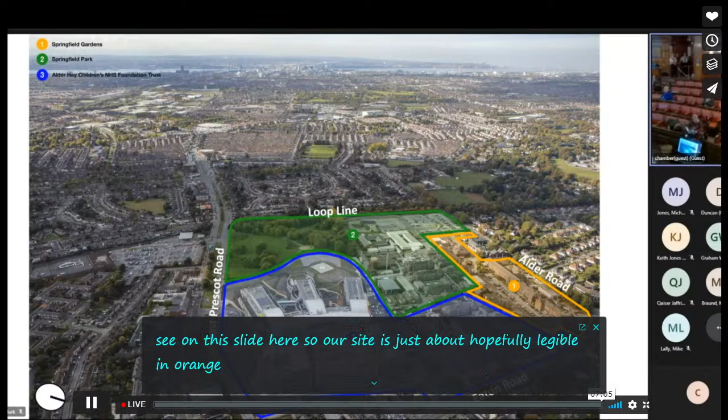This is a part redevelopment of the former Alder Hey Hospital site, as you can see on this slide here. Our site is just about hopefully legible in orange or brown, with Eaton Road to the bottom of the slide, Alder Road to the right-hand side, the new hospital and their expansion land to the left-hand side, and the new park and loop line to the south of the image.

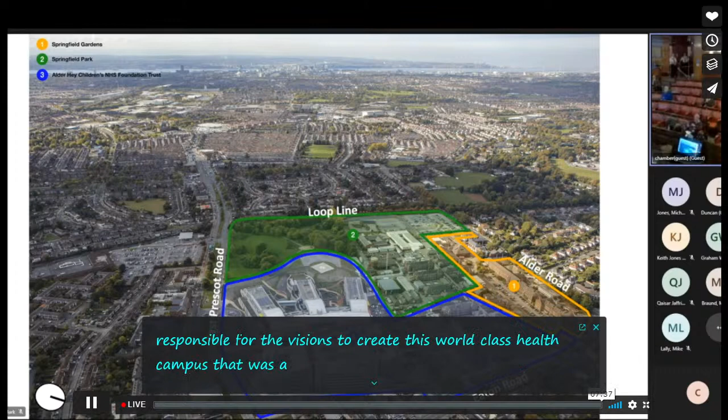BDP have been involved with Alder Hey since the hospital. In 2010, we designed the new children's hospital, and we were responsible for the vision to create this world-class health campus that was awarded in 2018 the Building of the Decade by the BBC.

We've also had a long history with Liverpool, delivering projects such as Liverpool One and that sort of transformational world-class placemaking. We feel Springfield Gardens is a key project both for us as architects and for our clients, Step Places, in delivering the completion of the Alder Hey vision for this site and creating a master plan that knits both healthcare and community together in a unique healthcare campus.

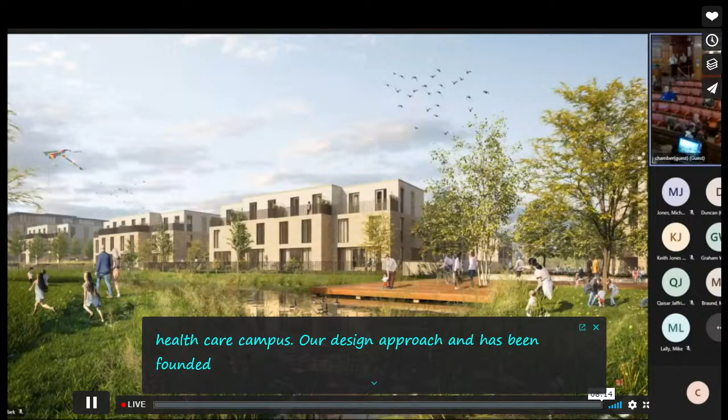Our design approach has been founded on a deep and detailed understanding of the existing site. We understand that the former Alder Hey Hospital played a key role in the foundation of the area surrounding it, and with the relocation of the hospital to its new home, it's created a gap between a lot of the uses.

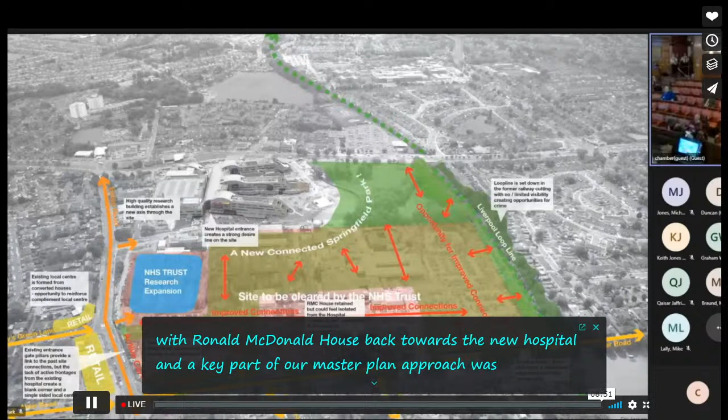Those uses were formerly surrounding the area on Eaton Road and Alder Road, with Ronald McDonald House back towards the new hospital. A key part of our master plan approach was about re-knitting those two things back together and creating a comprehensive, integrated master plan connecting with the new Springfield Park.

This slide captures our vision for Springfield Gardens. It's about creating a bespoke context to Alder Hey Hospital, responding to the needs of the NHS and the wider community, and creating a place that's a key piece of this world-class health campus developing on the adjacent site next to the new Springfield Park.

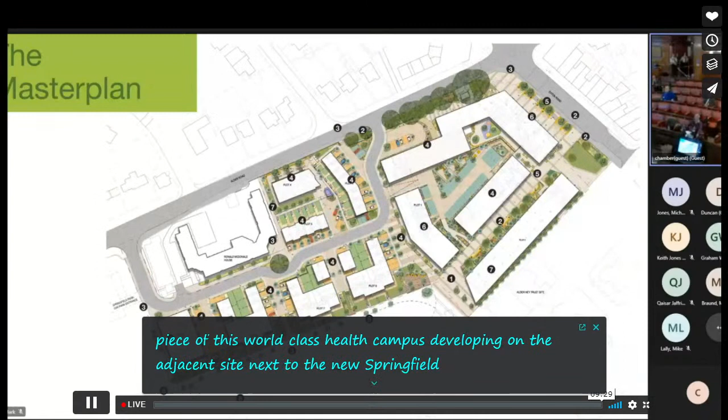Our plans for Springfield Gardens are not just about delivering houses on brownfield land. They're about delivering a new health-led mixed-use community, and the uses within the master plan are mixed and respond directly to that.

To the front of the site, we've got a new step-down care building solely for the use of the NHS. And to the side, running up our new Park Boulevard, is a new science research building for the trust.

To the base of these buildings, we've got some new local retail, complementary to the retail on the opposite side of Eaton Road, hopefully drawing people back to that high street that used to serve the hospital.

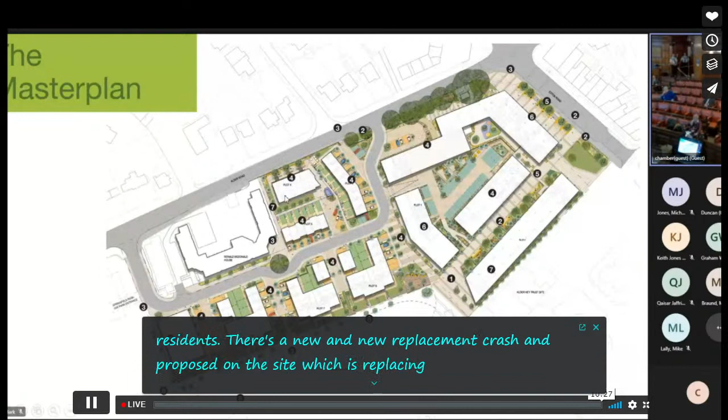To the base of this location, there's a new gym facility responding to the needs of the NHS and local residents. There's also a new replacement creche proposed on the site, replacing a former creche that sat next to Ronald McDonald House, with dedicated drop-off and parking facilities.

To the opposite end of the site, there's a new retirement building responding to the need to create high-quality retirement homes in the city. We're also delivering, next to Ronald McDonald House, specialist housing for young adults with autism, responding to the needs in Liverpool and to the department within the hospital.

We're also delivering a mix of family housing and apartments that deliver the vision set out to us at the start of the project—to attract and improve the retention of the very best people working for the hospital.

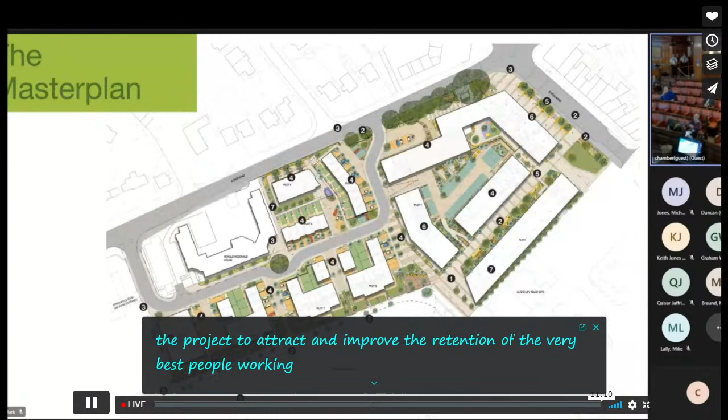Our master plan approach is about creating strong permeability through the site, extending the parkland landscape from Springfield Park through to Eaton Road, and breaking down the traditional barriers the hospital previously set. Our design creates a series of distinct character areas with scale and massing suited to and embedded within the existing context.

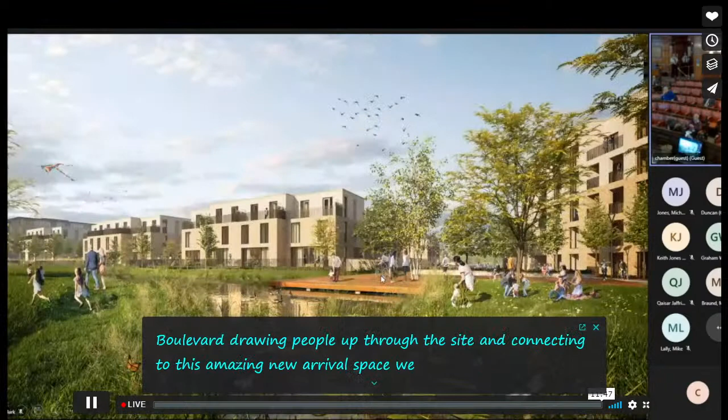We start with a new public piazza created to Eaton Road, delivering a new parkland boulevard, drawing people up through the site and connecting to this amazing new arrival space that links hospital, park and community together in one place.

Alder Road provides a key arrival space for us as well, and an opportunity to break down that former defensive nature of the site with wall and heavily planted edge, and draw connections through to the hospital and the park as a result.

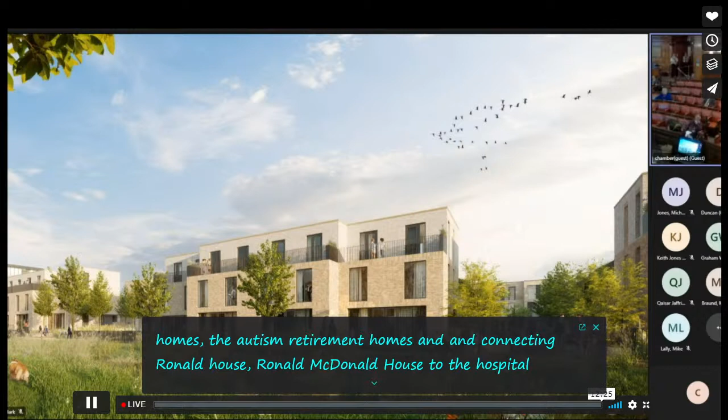To the park edge and Ronald McDonald House, we want to create a quieter residential feel for those family homes, the autism retirement homes. Connecting Ronald McDonald House to the hospital has been a key master plan consideration, with both a direct sight line to the hospital and pedestrian-friendly routes either through the park or through our development proposed.

The park edge is proposed to be permeable and democratic in its design approach, where everyone gets a view, and all the buildings take a well-known urban design principle of providing passive surveillance over the park and enhancing the feeling of safety and long-term usability of that space outside.

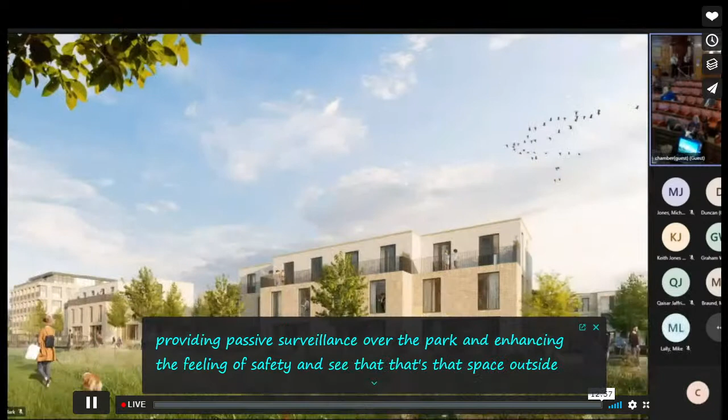After winning the competition in 2017, run by the NHS and the council, we really have taken our time developing this scheme. It hasn't been rushed into planning. We've developed a scheme through extensive consultation with both ward councillors, local community, MP, the planning, highways, tree officer, access officer and urban design officer.

Our scheme has evolved significantly over that period of time to respond to that commentary that we've received. And the scheme being presented today is a culmination of that process to create this really unique and high quality development that you see before you.

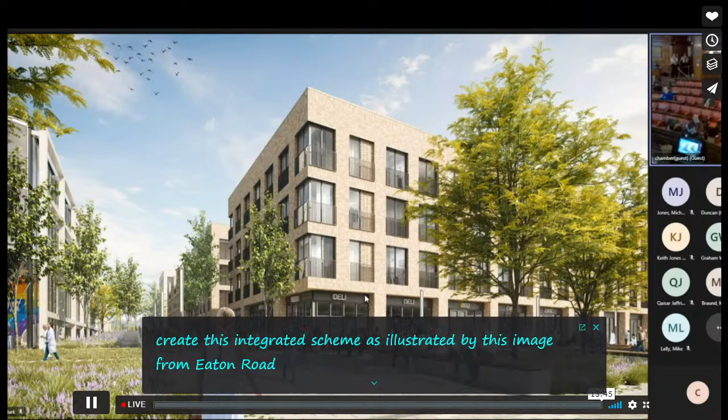Our approach is to create this integrated scheme as illustrated by this image from Eaton Road, where the Park Boulevard, as described, can be seen running up through the centre of the slide. And to the right hand side, you can see this serviced apartment building.

It has a relationship back to the former hospital building that sat on the site with its Victorian strong stature. And to the left hand side is a brand new science research building for Alder Hey itself, which is purposefully contemporary and dynamic and has an exoskeleton to present a biophilic design approach.

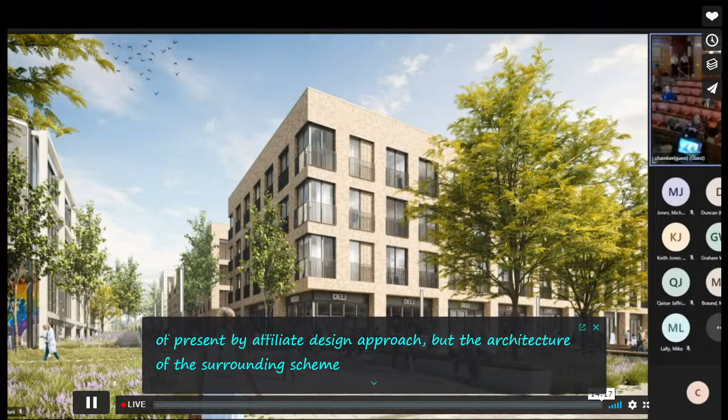But the architecture of the surrounding scheme is intended to be a family of buildings, predominantly in buff brickwork with a few other materials introduced for variety. That's intended to give long-term civic presence to this scheme that is soft and sensitive to the creation of this parkland environment that we want to create.

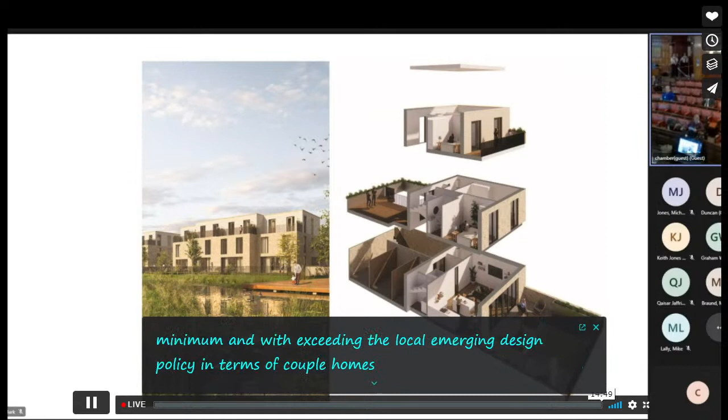All of the homes are designed to the absolute best standards. They're all designed to achieve nationally prescribed space standards as an absolute minimum. We're exceeding the local emerging design policy in terms of accessible homes. And all of the homes that you see before you are bespoke house types. None of these are houses or apartments that have been used on previous schemes. They've all been designed bespoke for this site and this context.

One of the key points obviously is we are providing 2 movement access points, and both of those access points are making use of existing locations of access onto the site. They're not new locations. And as Harry, my colleague, mentioned, our design approach is absolutely in line with Liverpool's policies.

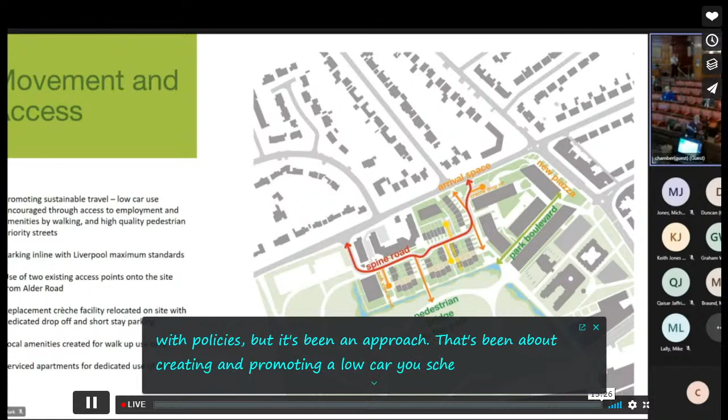It's been an approach that's been about creating and promoting a low car use scheme through access to public transport, obviously employment through the NHS, but also creating all of the amenities that are necessary for people to live sustainably on this site, and obviously have amazing access to the park and the loop line surrounding.

Trees have obviously been a key consideration for us. Alder Road does have a strong green feel, and we are proposing some tree removal to that location in particular. That's about delivering our vision in order to open that aspect and deliver our development.

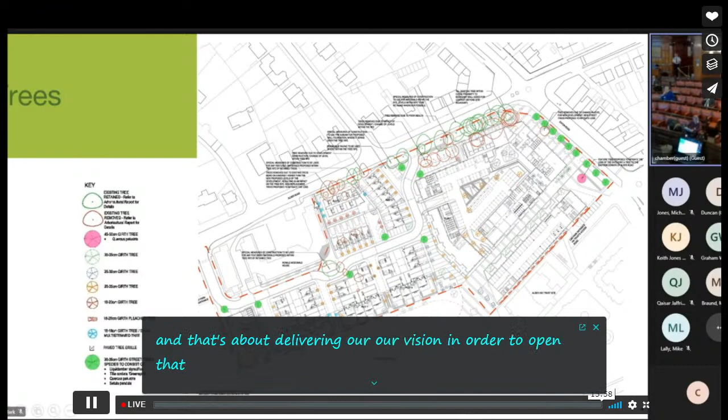But we are providing a significant enhancement to the number of trees that are being provided, with over 140 new trees being planted within the scheme, and a significant amount of net biodiversity gain.

This sort of just shows you some of that context with Windmore Road there, and some of those trees running down that side. And the vast majority of those trees are being retained. That aspect should be noted as well.

Inclusive access, as I've mentioned at the outset of this scheme, is all about inclusive access. The context of where it sits is massively important. We are looking to over-provide M4(3) homes within the scheme, and health and wellbeing has been the foundation block of working in this health campus environment that we see ourselves. So that's about creating new public spaces, extensive greening on the site, minimising the need for car usage, and creating buildings that are inherently sustainable and ecologically friendly.

In summary, we're massively excited by this scheme before you today, and this has taken a long time to bring forward, and we're very pleased to have the support of your officers. We believe this is a really unique opportunity to not only create a high quality mixed use residential development, but also one that promotes and supports Alder Hey Hospital, and we think this is going to create another piece of that world-class health campus that will keep people coming back to this site and want to be employed on this site long into the future.

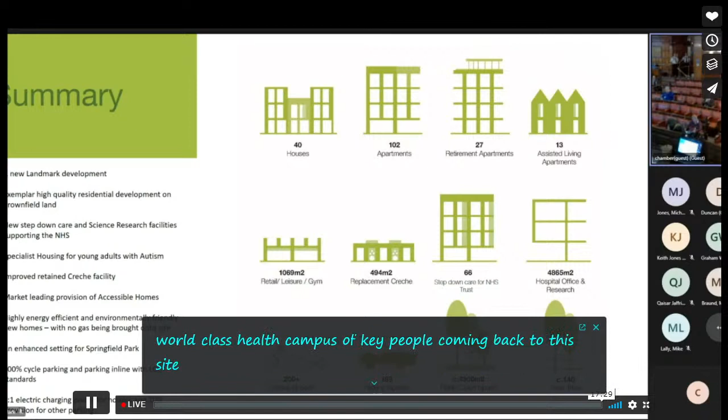I'll now hand over to my developer, Harry Dallywell, to talk you through his approach to the scheme. Thank you.

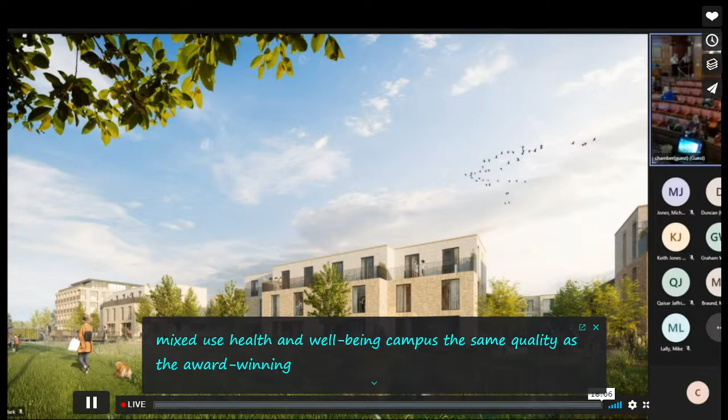Good morning, my name is Harinder Dallywell. I'm the Managing Director of Step Places. We're an award-winning placemaker and developer. We work across the northwest of England with public sector partners, bringing forward and delivering sustainable design-led schemes. The brief was to produce a mixed-use health and wellbeing campus with the same quality as the award-winning hospital buildings, promoting the benefits of healthy lifestyles through placemaking and sustainable development.

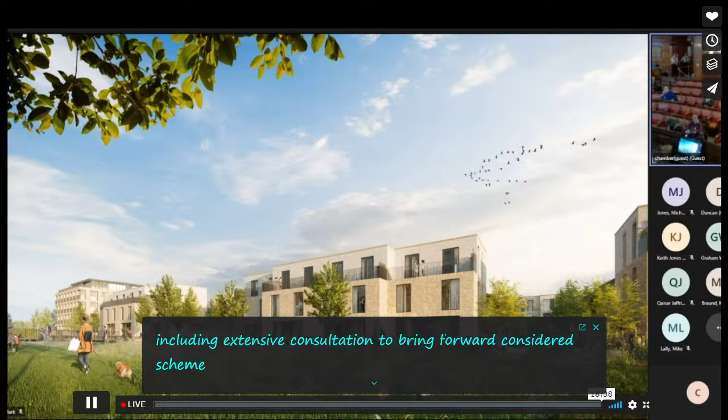Subsequently, we pulled a strong professional team together, working with Step Places to deliver the vision. The scheme brings together all of the above and helps to meet the needs of the NHS staff to buy and rent homes next to the hospital. We've worked closely with all the stakeholders, including extensive consultation, to bring forward a considered scheme that brings additional amenity to the hospital and to the local community.

The scheme will deliver a significant number of jobs, including apprenticeships, and will help to boost the local economy. We will be funded by Homes England on this development, and this is most definitely a scheme we are very keen to deliver. I'd like to show a short video, which hopefully helps people visualise the scheme that we're presenting today.

I'd like to show a short video, which hopefully helps people sort of just visualise the scheme that we're presenting today.

Hope this video helps everybody visualise the scheme, and we are very proud of the scheme, and we hope it's an exemplar scheme for Liverpool. I thank everybody for their time today. Thank you.

Thank you very much. Does any member of the committee have any questions for the developers? Yes, I'll take Councillor Radford first.

Good morning, Councillor Steve Radford. When I've been involved in designs of a lot of the new estates in my own ward and some of the other facilities, we've tended to look at the American principle of a new estate having one entrance in and one entrance out, because for road transport that prevents through-cut driving and reduces crime. And on this plan, I just checked with John, there's two major entrance points. How does that impact on community safety? I appreciate what you're saying about making it open plan to the park. I get that for pedestrian traffic, but has there been any consideration of the impact on community safety in the plan? I'm going to be honest, I think a lot of us who represent wards along the loop line has found it a nightmare for criminal activity, and I'm wondering, I understand where the ethos comes from for having open sites, but does that conflict with our objective to create safe space for people who live there? It just contradicts some of the principles that I would have normally expected on your estate to apply. So I don't know if you could share any thoughts on that.

Just checking I could come in then. Yeah, absolutely. The principle of providing two entrances is about minimising the need for car movement around within the site itself. The site, as within the characterised zone, has the apartment buildings and primary hospital uses to the northwest of the site, and the primary residential streets are to the south, so that it reduces car movement around those kind of areas. We're retaining a very large existing tree that sits outside of Ronald McDonald House's main entrance into the site, that effectively forms a sort of chicane within the site and slows down car movement. Within the actual scheme, hopefully it comes across, you can see there's a lot of high quality public realm that runs down informal streets to all of the side streets.

So effectively there's a series of mews streets that come off a spine road, all intended to be pedestrian priority spaces, with the spine road getting very minimal movement, working with our highways consultant. It was a key consideration that it didn't become a cut through from Alder Road for people looking to divert, and the design principle of promoting a pedestrian environment first should discourage those movements.

I think a more contemporary approach to residential planning is about creating permeability rather than single entrances, and the congestion that single entrances can cause. People don't want to live next to the single entrance into the site, so creating multiple entrances is much favoured in more contemporary developments, from our experience.

Hopefully that answers your question. Does that answer your question?

Not very convinced by it, if I be truthful, because if you look at the residential roads to the left, there isn't any housing by the entrance points. And if we accept the engineer's argument that it doesn't add congestion, then saying we need two access points because it won't add congestion doesn't seem compatible. But I understand what you're saying, and I appreciate your courtesy.

Thank you. Any further questions? Yes, Councillor Mahoney. Thanks, Chair. A couple of questions, if I may. The first one is about the accessibility of the housing.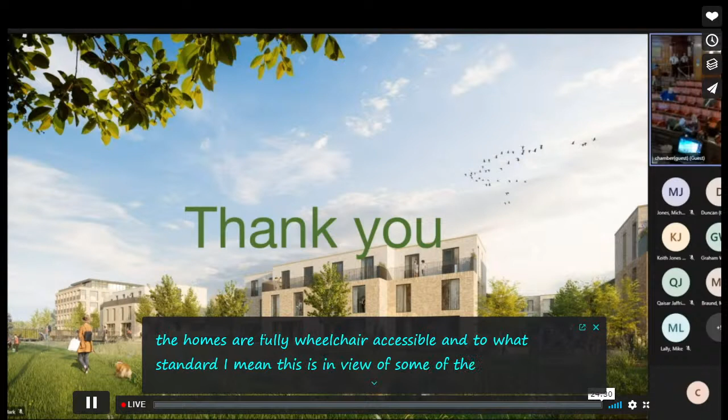So how many of the homes are fully wheelchair accessible, and to what standard? This is in view of some of the comments of the local councillors, especially Councillor Pam Thomas, who've raised this issue. I'd just like to know: how many of the homes are fully wheelchair accessible?

Would you like to address that, please? Yes, so 13% of the development — your emerging local plan policy requires 10% provision of M4(3) adaptable homes, and we're providing 13% that are M4(3) adaptable. Councillor Pam Thomas withdrew her objection on the basis of accessibility. We developed this scheme five years ago, before the emerging policy was even developed. Since then we've fully invested in that provision, with full M4(2) compliance and 13% M4(3) compliance, which is over and above any other scheme in Liverpool that we understand.

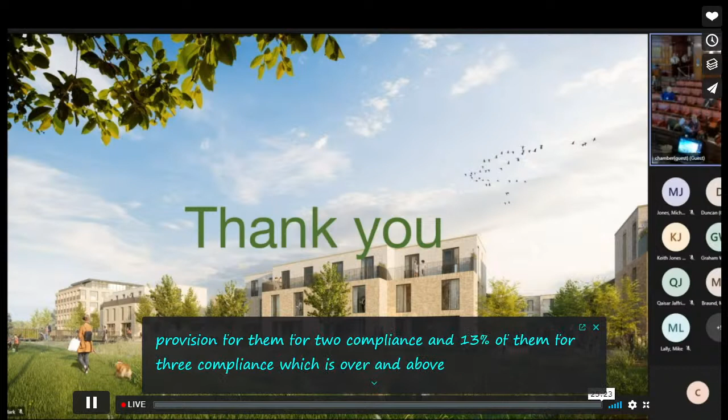Thanks for that. Thanks, Chair. Second question, if I may, Chair. It's about parking. I understand the comments that the development is acceptable with respect to parking and traffic, especially with respect to the UDP.

If I can state, as somebody who knows that area reasonably well, they may be acceptable to the UDP, but they're not practical for local residents. To say you're selling homes for £350,000 and above, and expect people not to have cars when they've got that kind of money to spend, is totally unrealistic. All that's going to happen is an overspill of parking into the existing residential areas, leading to a massive problem for those residents.

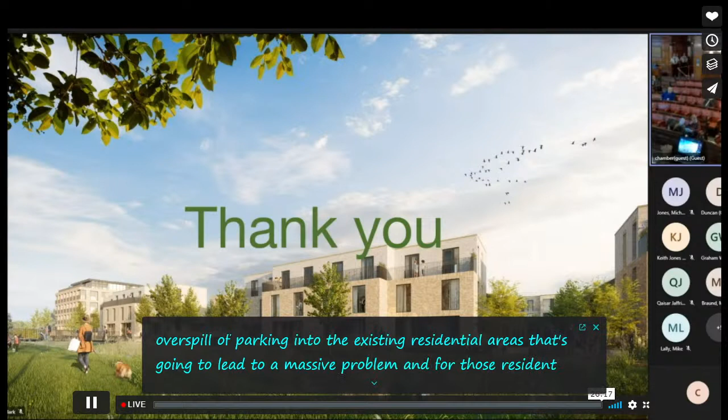I'm sure we're going to hear about that in detail coming on. I do think the parking plans for this development are totally unrealistic, and these plans are overdevelopment without proper infrastructure in regard to parking. Thanks, Chair. Thank you — I think that was more of a comment than a question.

Would you like to address that, please? Yes, just to say your highways officer is in full agreement that the plans are fully in accordance with policy. Responding to your point about the level of parking provision, this approach is common throughout very high quality, Stirling Prize winning, award-winning developments. It's about people buying into this type of approach — not everyone wants two cars. This is about people buying into a new way of living, reduced car ownership, and looking to more sustainable modes of transport in future. This is a known principle being applied across many developments.

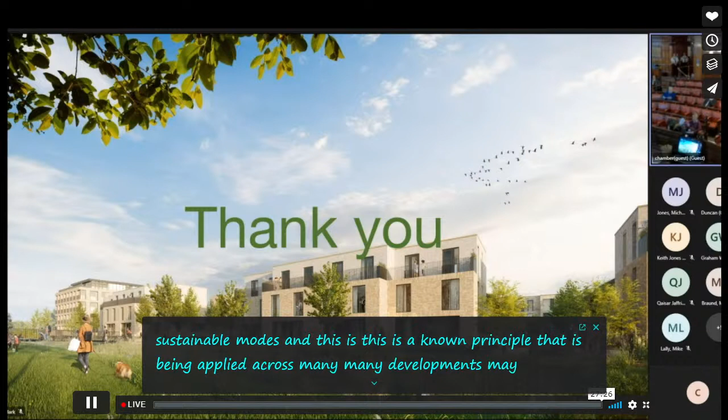May I ask Councillor Mulhoney — yes. Can I ask a supplementary on that? I understand that in some developments it's possible to have a covenant on the property so that people who buy there will not be able to own cars, as one of the conditions of moving in. Could that not be applied to this case, to give local residents assurance that parking will not be a problem for them? Thanks, Chair. Do you have a further comment?

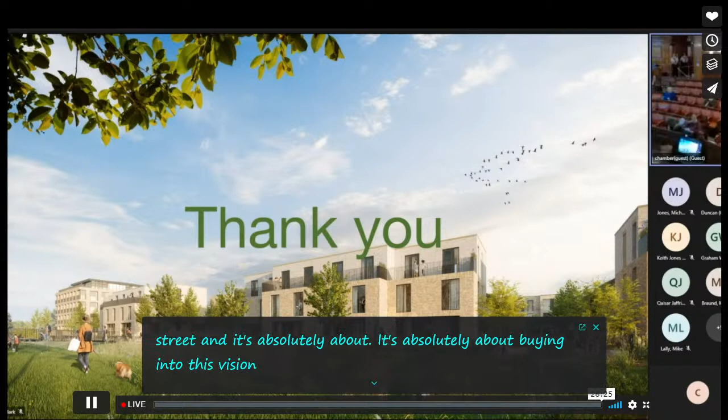Sorry, just to add, as part of this development, there's a series of TROs being applied within the local area, and we're accepting a covenant within our development that will prevent us from being able to apply for a parking permit within the local area. So this is absolutely about people buying into this way of living on this site, not about buying two cars and parking on a local street. It's about buying into this vision for this site - you're part of the world-class health campus, and that's the principle of what we want to create here.

Chair, can I just respond to that, please? Because I don't think my point has been addressed. What's been said is they're not going to apply for additional car parking. What they haven't said is that people are still going to be allowed to have multiple cars, which will lead to problems with overspill in the surrounding areas. So it reinforces my point that parking provision in this development is inadequate.

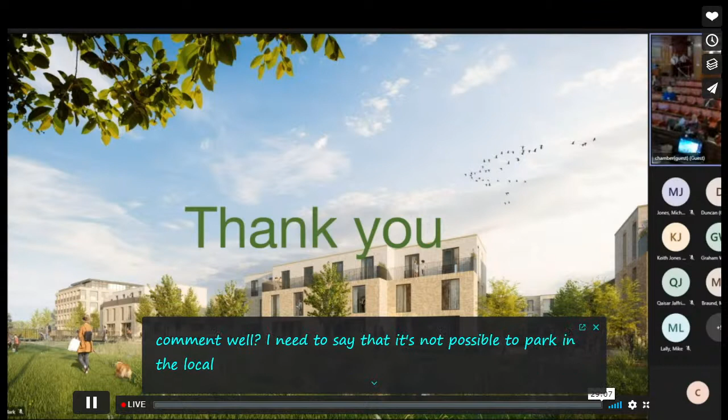I don't know if there's anything further to say, or if we move on to another topic. Did you have a further comment? Well, only to say that it's not possible to park in the local areas, but other than that, nothing else to say. Thank you.

Councillor Hanson. Thanks, Chair. I mean, this is a massive project. I'm just trying to tease out - on Building A, 4-storey in height, it contains serviced apartments for use by visitors and hospital staff and visitors. My question is, in terms of the move forward for Alder Hey, how critical is that requirement for that kind of usage on that site? Would the developer like to respond, please?

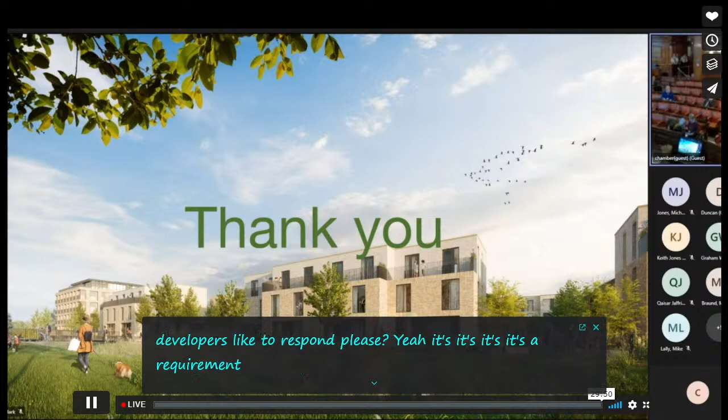It's a requirement the hospital wants because their wish is to release hospital beds - sorry, it is a requirement for Alder Hey Hospital. They want to release beds by having the step-down facility. So for them, it's quite an important part of the campus.

On plot 4, the apartments for autism - again, I think this was the first time I've been involved in a planning application for apartments for autism. In terms of Alder Hey and the NHS moving forward, is that a critical element of your proposals, or is that just something nice to have? Again, it was a requirement from Alder Hey. They have an autism department, and this is a specialist autism provision that they required.

Thanks, Chair. Thank you. Are there any further questions or comments from the committee? Thank you.

We now have a number of objectors. Each objector will be allowed up to, but no more than, 3 minutes to address the committee. The committee will only consider and take into account material planning matters. If an objection does not comprise these, then it cannot be taken into consideration by the committee. So I will call, first of all, Graham Winrow to address the committee.

Firstly, I would like to ask that the following be minuted in the record of this meeting. I'd ask for assurances from the members of the committee that the involvement of the ex-mayor, Mayor Anderson, and the chair of the committee, Councillor Conception, in the political meddling that has gone before regarding Alder Hey and its long-held desire to get residential developments onto the site, shall in no way influence the decision today. I say this because recently it's come to the attention of the community that the former mayor entered into an arrangement with the trust in April 2015, which would see LCC and Alder Hey set up a joint venture to share profits from an ill-fated 2016 application to build over 400 residential dwellings on the site. I say recently come to the attention because both Councillor Conception and another councillor at the time were chair and treasurer of the local Friends group, and both failed to inform members of the group that such an arrangement existed. Councillor Conception continues to involve himself in all matters relating to Alder Hey and Springfield Park, continually seeking to be viewed by the trust as a key stakeholder. So I'd like that placed on record, please.

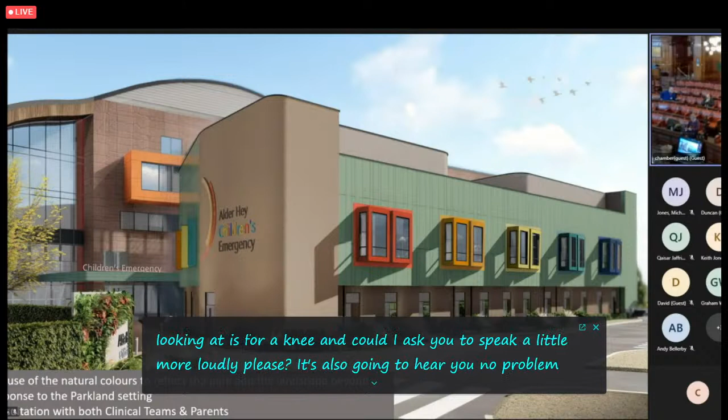I just wanted to talk through the proposals. The scheme we're looking at is for a new neonatal unit, a paediatric assessment unit, and also an emergency decisions unit.

The scheme you're looking at now: on the first floor we've got the neonatal unit, and on the ground floor we've got the extension to ED.

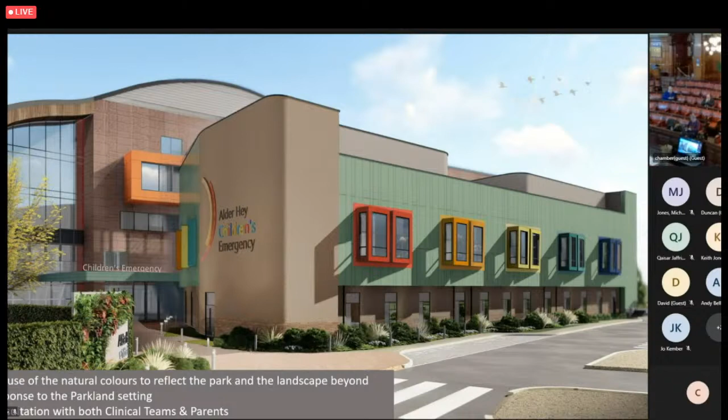We're using colours and themes that respond to the park, using the natural colours of the render and also the natural colours of the cladding. We've consulted with the clinical teams and also with the parents to arrive at the aesthetic of the building, and we are moving forward today to discuss the proposals.

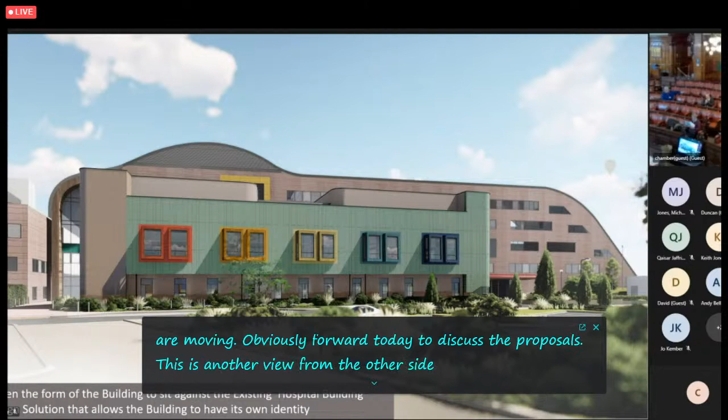This is another view from the other side. It's a soft building, almost like a transition to the park. So the design solution still has its own identity and sits separate from the main building, but isn't in conflict with it.

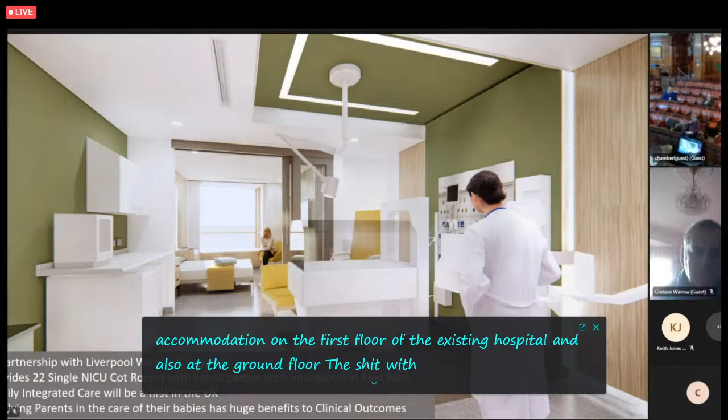In partnership with Liverpool Women's Hospital, Alder Hey Children's Hospital is going to provide 22 cots of accommodation on the first floor of the existing hospital, and also at the ground floor. The partnership with Liverpool Women's is around children who need special surgery. Children born at Liverpool Women's who need surgery will move to Alder Hey, where they can have that surgery but also be cared for in an environment that is very different from the approach taken before.

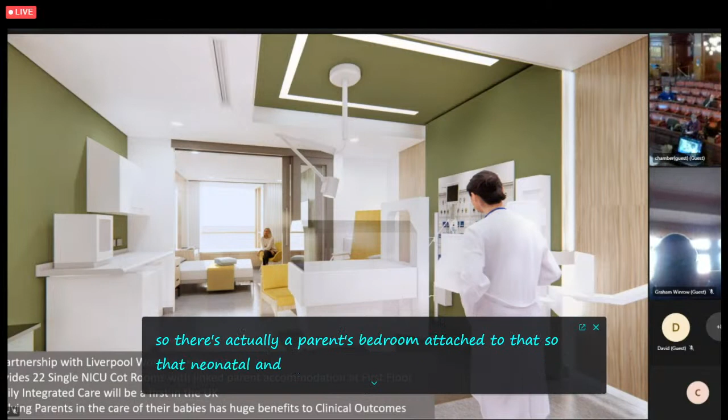The Trust is really keen that we provide the 22 cots with linked parent accommodation, so each single room has a family integrated care element, with a parent's bedroom attached to the neonatal bedroom, which will be the first in the UK. This has been done in other countries, in Canada and Scandinavia, where outcomes for babies are massively improved by having parents as an integral part of their care, with benefits to clinical outcomes not just initially but also in later life.

This is an image of the parents' rooms, at the back of the neonatal care area. All the rooms are en suite and have a calming interior, designed to promote the well-being of parents and give them privacy, while allowing them to be as close as possible to their babies and integral to their care and well-being.

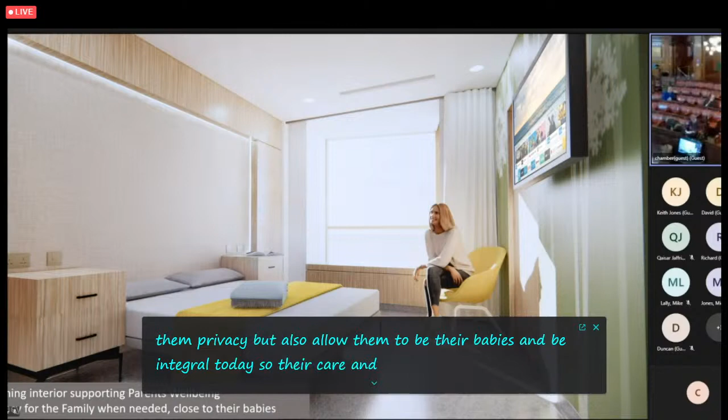That's all we have today. Thank you. Does anybody have any questions or comments? No? Thank you very much.

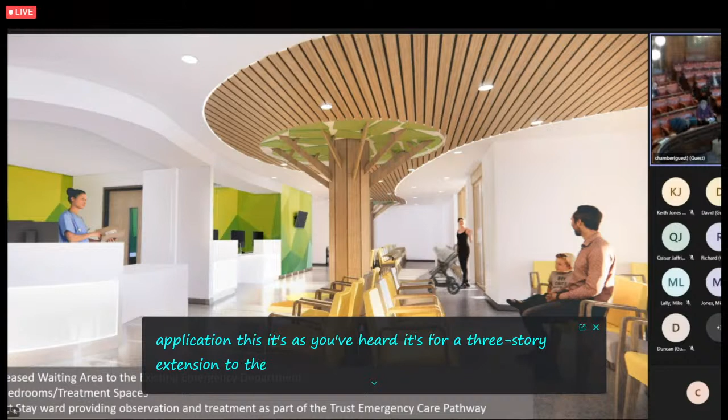A fairly straightforward application, this. As you've heard, it's for a 3-storey extension to the new Alder Hey building for relocation of the emergency decisions unit, a paediatric assessment unit, and a new neonatal intensive care unit.

I'll just very quickly take you through the report, Chair, particularly in relation to policy. You'll see in the report that this is actually green space in the UDP. The reason it's in green space is because the new hospital is within the previous park, and so that is an historic designation. Obviously, given the passage of time and where we are now with the local plan, we've given much more weight to the new local plan than the green space allocation, but I think it's important to reference that point.

In terms of its wider design and layout, again there's quite a detailed section there, and you've had the presentation. We've sought some amendments throughout this to try and get the design to more closely reflect the main hospital building, which has now been successfully achieved. There's a little section on amenity, and again very simply, we're satisfied that there is no impact on nearby residents, or indeed the proposal for the residential development further up the end of Alder Road, Eaton Road.

The other issues, Chair, are fairly self-explanatory. We have brought this to you primarily because it has a Section 106 associated with it. There has been an objection as well, but that objection refers to the wider issues again about the replacement park and so on. The Section 106 is to provide for some street trees and for an art strategy. So, subject to the usual conditions, Chair, and that legal agreement, we're happy to recommend approval, and happy of course to answer any questions.

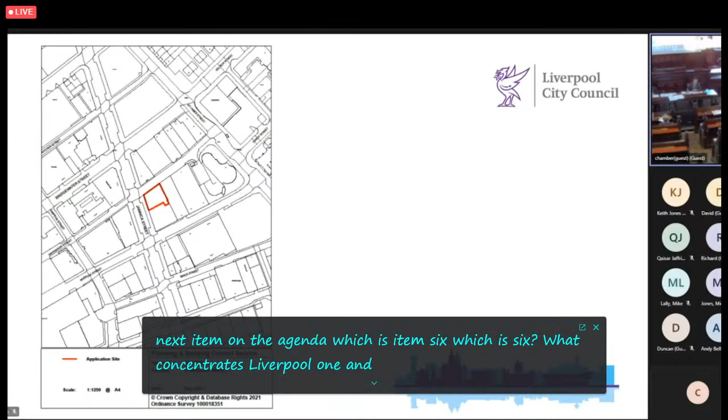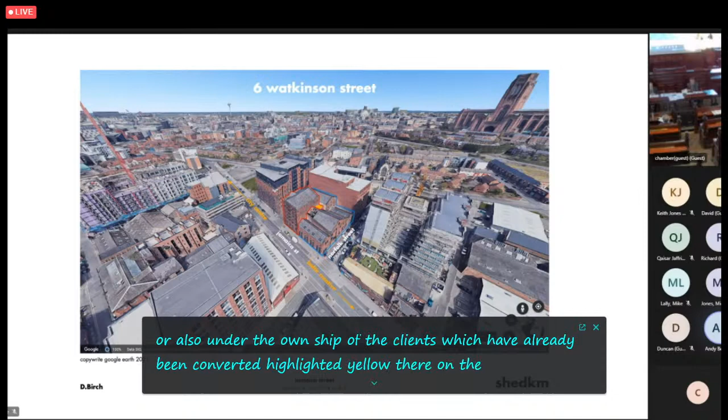So, 6 Watkinson Street is the conversion and extension of the former 6-storey warehouse on the junction of Jamaica and Watkinson Street in the Baltic Triangle, highlighted red on the aerial image you can see there. As you can see, the building sits between some recently extended and new build developments, and the adjoining buildings highlighted in blue are also under the ownership of the clients, which have already been converted. Highlighted yellow on the image within the red line is an area of flat roof tucked in between the pitched roofs of the adjoining buildings, which we are going to utilise as the external plant space. You can move to the next slide, please.

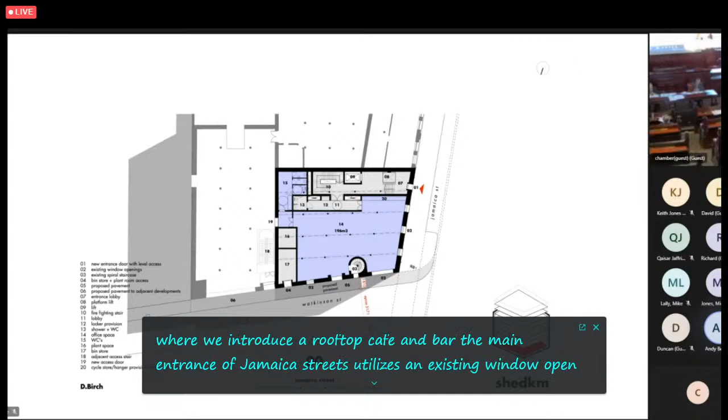The proposal looks to convert the warehouse into commercial office space with a rooftop extension of 2.5 storeys above the existing parapet. On the screen is the ground floor plan, which represents the typical floor layouts, each of which have the circulation core and WCs to the back of the plan, and an open office floor plate, with the exception of the top floor, where we introduce a rooftop cafe and bar. The main entrance off Jamaica Street utilises an existing window opening with the sill dropped down to ground level, and along Watkinson Street we utilise the existing door openings for refuse and plant access.

Next slide, please. A planning application of the same proposed building envelope and massing received a resolution to approve back in January 2020 for use as an apart hotel. Since then, the client chose to change the use to commercial office space, and this was submitted back in Christmas 2020 with the same external envelope and massing.

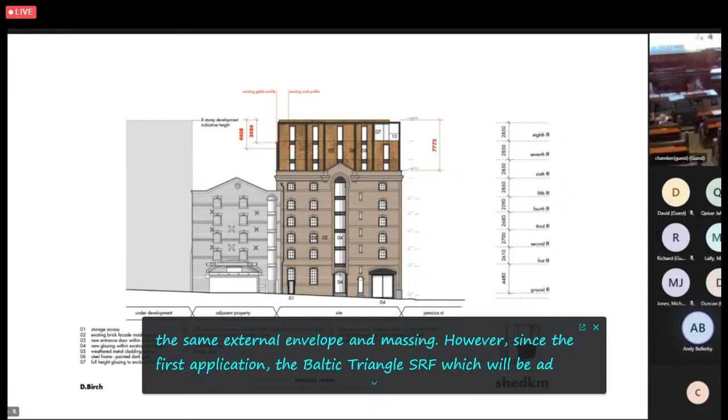However, since the first application, the Baltic Triangle SRF, which will be adopted as an SPD upon the adoption of the Liverpool local plan, has taken more weighting. Within this Baltic SRF, the only guidance for rooftop extensions stipulates for buildings over 4 storeys, roof extensions should not exceed 2 storeys or 8 metres, and roof extensions should not inappropriately dominate the existing building by extending too far from the original building fabric.

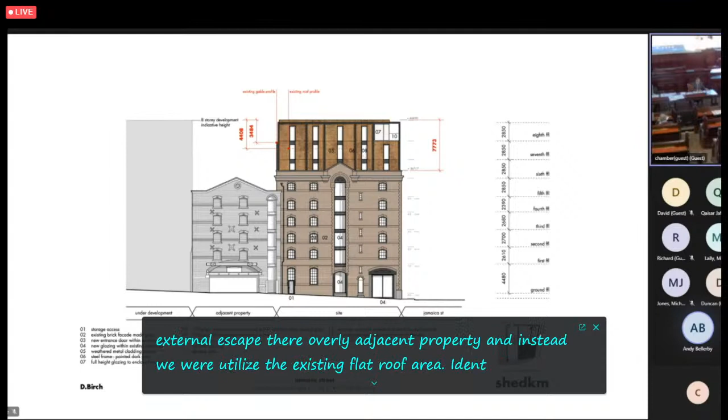In response to this, we have improved the design of the previous application by now omitting the 1.6 metre high rooftop plant and external escapes there over the adjacent property. Instead, we will utilise the existing flat roof area identified in the first slide, sat between the adjoining pitch roofs, thus bringing the height of the extension down to approximately 7.7 metres above the existing parapet, which is below the 8 metres stipulated in the SRF.

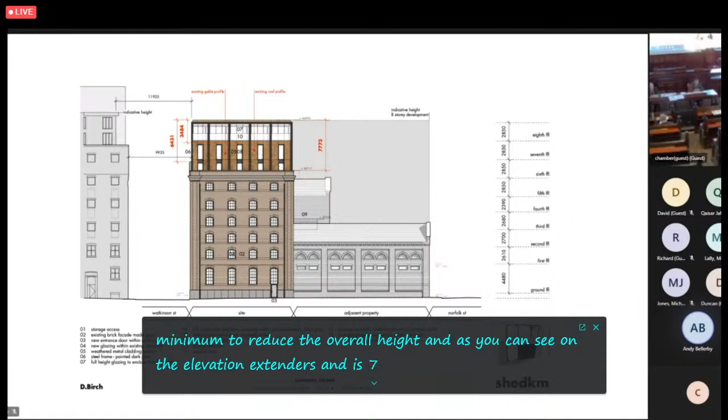Whilst the extension is 2.5 storeys above the existing rather than 2 storeys, we have taken steps to make sure the extension appears subservient to the existing building. Firstly, the floor heights are kept to a minimum to reduce the overall height. As you can see on the elevation, the extension is 7.7 metres above the parapet and 3.5 metres above the existing pitched roof height.

Externally, we have detailed the elevation with an exposed exoskeletal frame set back from the face of the existing brickwork, with cladding set back behind the frame too. The exposed columns are full height without a horizontal break in the form of a beam to avoid expressing the number of additional storeys, and the full height windows are expressed as continuous vertical slots. This helps the extension appear as an extruded form of the existing building rather than an object sat on top and feeling too top heavy.

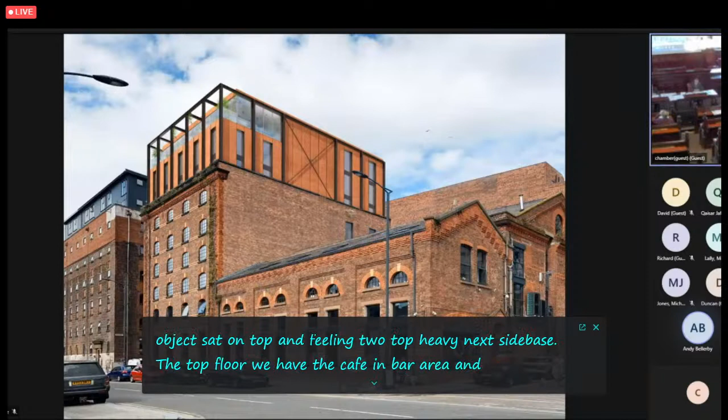At the top floor, we have the cafe and bar area. Here we have set back the massing and provided a terrace area with glazing across the principal elevation to Jamaica Street to also help reduce the perceived massing. Along with the approach to the detailing and the industrial palette of materials in the form of steel and weathered metal that complement the existing brick building, we feel that the proposal is an elegant addition to its surrounding context and the Baltic market.

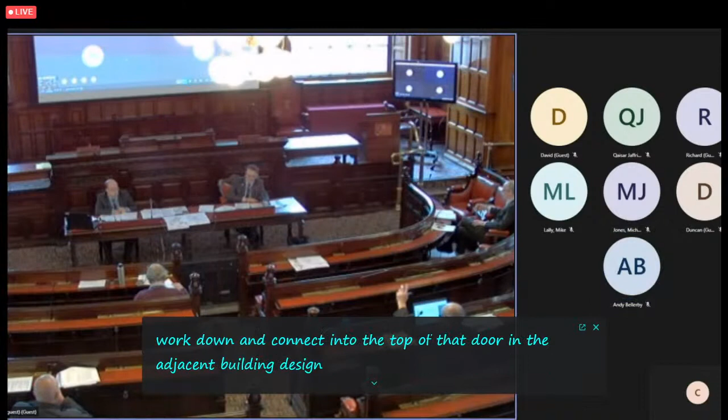My question, well, it's more of a comment really, and it's somewhat subjective, but it's about the aesthetics of this extension. And looking at it, I do realise that there is an orthodoxy within the planning community that pastiche is bad, but I think this extension does stand out as glaring somewhat against the existing building that it's being put on and also the surrounding buildings. I just wonder what the architect's views are on that.

Andy, have you got any comments you'd like to make in response to that? I could give a subjective response, but I think considering the state of the extensions in the adjoining properties in close proximity, I think it's certainly a far better example of architectural quality. Well, as is the case, obviously, you know.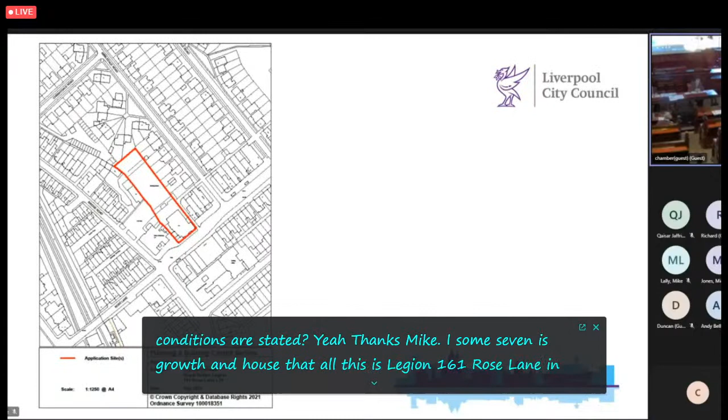Chair, thanks Mike. Item 7 is Crawford House, the Royal British Legion, 161 Rose Lane. In relation to this particular application, if members recall, this was withdrawn at the last committee because the applicants had put in an objection for non-determination.

So what we're doing this morning is to give a view. And although we've got the agent for the applicant here, who's happy to answer any questions, there are no speakers against. If I can ask Stuart to take us through this application, and then if members have got any questions or comments, we'll move to the vote.

Thank you, Chair. Stuart Clark, team leader for the South team. As the Chair's alluded to, this application is before you for you to offer a view to the planning inspectorate as to what the committee would have resolved had they had the opportunity to make a decision on the application.

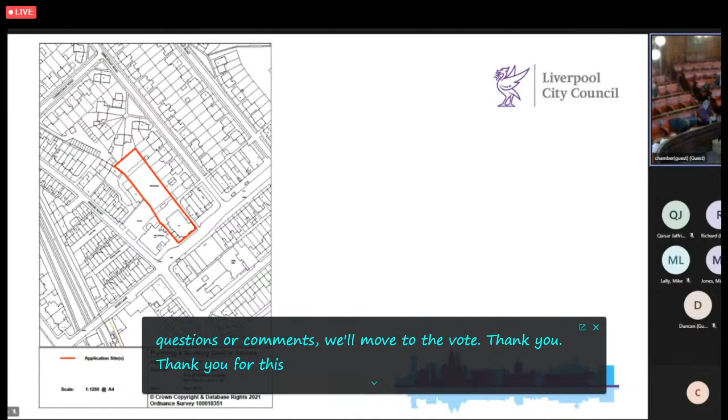It was scheduled to be on an agenda on the 27th of July, but the applicant put an appeal in against non-determination about 3 or 4 days before that. As a result, the application was withdrawn from the agenda whilst we were pending the start date for the appeal, which we've now had. Thus, it's back before you today to consider, so you can make a resolution to offer a view to the inspectorate.

This is an application to erect 10 new apartments and convert the existing sports and social club into 8 apartments. It's part outline, part full, with the full element being the conversion, and the outline with all matters reserved being the area located on the bowling green to the rear of the site.

There was a previous application very similar to this for 4 more new units. That was refused on the basis of impact on future occupiers from a building in the Rose Mosley car park, but primarily towards the impact on overlooking of gardens in Ribblesdale Road from windows in the gable elevations of the blocks. That was considered by the planning inspectorate, who was happy with everything apart from the overlooking element, and the appeal was subsequently dismissed on that basis and that basis alone.

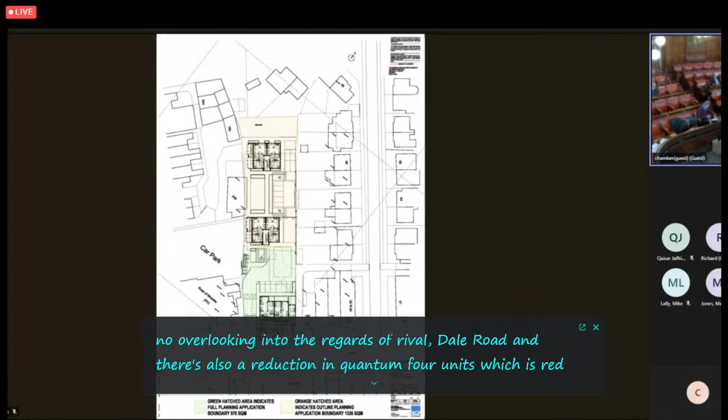So the applicant has now resubmitted the application with a revised indicative layout that demonstrates there can be no overlooking into the rear gardens of Ribblesdale Road, and there's also a reduction in quantum of 4 units, which has reduced the scale that the inspector originally dismissed the appeal on. Therefore that appeal decision is a very strong material consideration.

As I've said, the front part of the site is the Sports and Social Club, and this sits within the district, within the local centre, with the remainder of the site being primarily residential. The conversion of the former Sports and Social Club is acceptable and will provide a sustainable use for the long-term future of the building, with the alterations such that they will not affect visual or residential amenity.

The flats comply with the national space standards and will be appropriately served in terms of parking, waste and cycle provision. The principle of developing the site is considered to be acceptable and was not objected to by the Planning Inspectorate in dismissing the previous appeal.

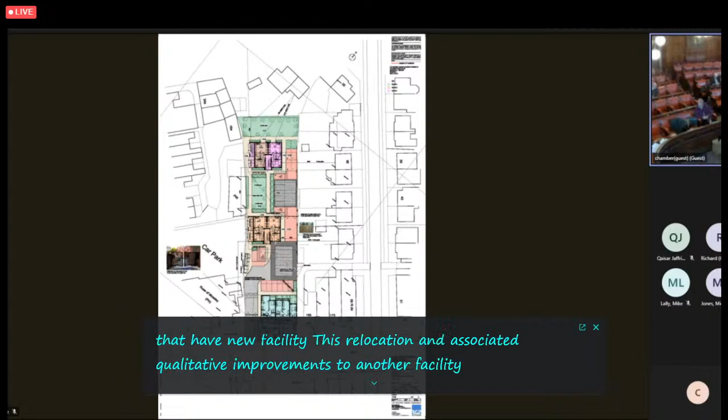It will involve the loss of the bowling green. However, the bowling club that used to use the green have been relocated to the underused facility at Longcroft Avenue, where the applicant has also funded a qualitative uplift in that facility to improve facilities not just for the replaced bowling club, but for all users of the Longcroft Avenue facility. This relocation and associated qualitative improvements to another facility are considered to be acceptable so as to outweigh the loss of the existing bowling green.

If members are minded to approve, there are parameter limitations that require the maximum height. The blocks can't exceed 11.5 metres and they can't exceed the eaves to 7.5 metres. There's also a condition that restricts any clear glazed windows being inserted on any reserved matters design that would face properties in Ribblesdale Road, which overcomes the inspector's concerns.

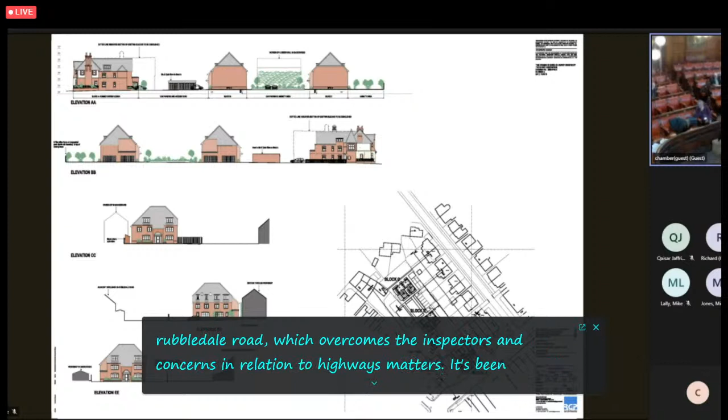In relation to highways matters, it's been carefully assessed by the Highways Department, and it's considered that the level of parking provision for both elements at 17 spaces is acceptable. Although it's one less than would normally be required, the site's location in a highly accessible location for public transport, with Mossley Hill Station being very close nearby, good bus links, goods and services in very close proximity, and significant cycle store provision, means the level of parking is considered acceptable. In terms of impacts on the local highway network, it's considered that trip generation would be less than that currently generated by the former social club, which is the lawful use of the site, and the proposal will not be detrimental to highway safety or unacceptably affect the local highway network.

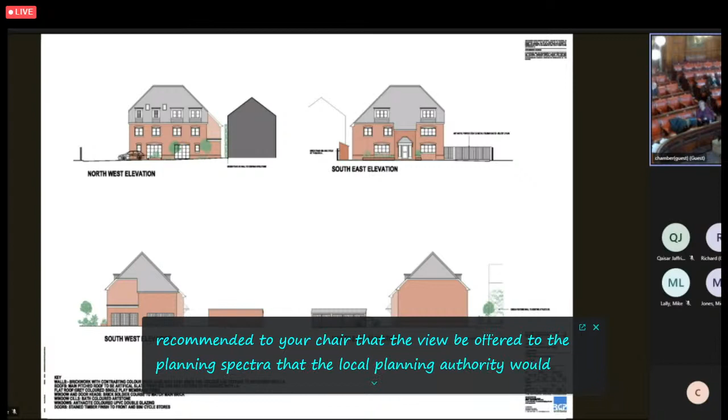Concerns relating to ecology and trees have been duly considered by the relevant specialists, and they raise no objection on these grounds, with the site not being designated as a site of nature conservation value. It's therefore recommended to you, Chair, that the view be offered to the Planning Inspectorate that the local planning authority would have recommended approval of the application if it had had the opportunity to determine the application, and that's what your officers are recommending today.

Okay, thanks, Stuart. Do members have any questions either for the agents or to Stuart?

Well, in that case, can I move that the recommendation be approved?

Thank you, Chair. Just for the benefit of those viewing proceedings, the recommendation from the Chair on this occasion is purely for the committee setting out its view and position on the application, where it's still to have the capacity to determine it. However, at the moment, the application will be determined by the Planning Inspectorate through appeal.

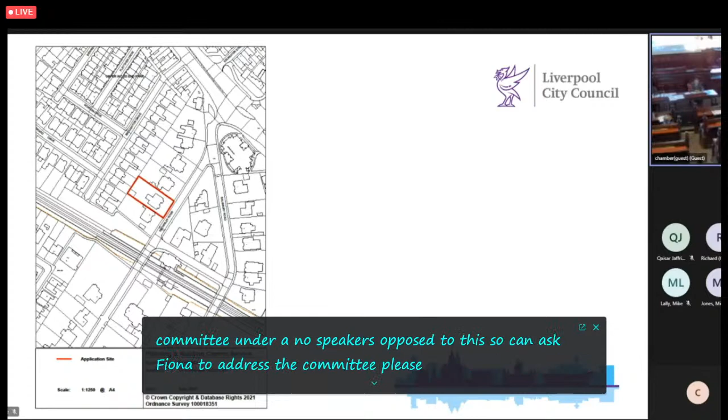Hi, thanks for hearing me today. The application is just for a small existing coach house in Cressington Park. It's at present in an extremely precarious structural state, and the engineer who has done the report on it has basically told the owners to gate it off and don't use the garden because it is that close to falling down. We are proposing just to reinstate this existing coach house to its original form, albeit with new windows.

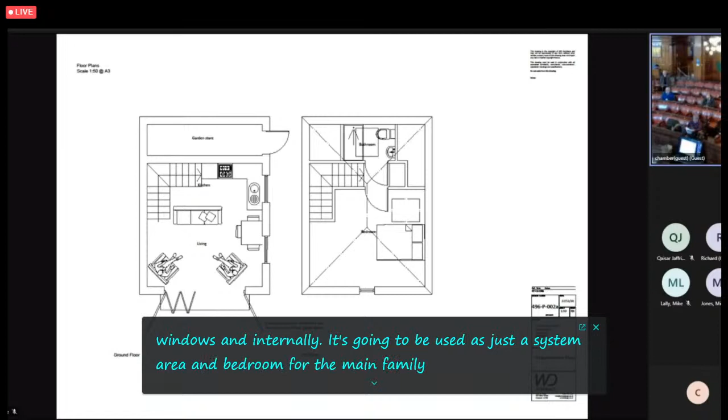Internally, it's going to be used as just a sitting area and bedroom for the main family house guests only. The applicant is fully aware of all covenants that are attached to Cressington Park about having separate dwellings that are not allowed. It's never been his intention to do this. All power and facilities and services are coming from the main house to the coach house. It is not a separate dwelling. I would just ask you to recommend this for approval and help save this coach house.

Thank you. Do members have any questions for Fiona before she sits down? No? Can I bring in Stuart, the team leader, who's going to take us through this? Thank you, Chair.

Despite what would appear to be quite a significant number of objections, it is relatively straightforward. The reason, if you look at the description, it does say 'a separate unit of accommodation.' That's because it's capable of being, it's got all the facilities that would be needed to live separately from the main house. That's the description behind it.

But as you've heard from the applicant, and you'll see there's a condition attached, or a proposed condition attached to the report, is that occupancy would be strictly limited to being associated with the main dwelling. So it can never be occupied by somebody not associated with the main dwelling house.

And you'll see from the objections before you that the vast majority of them are about concerns about it being hived off as a separate unit of accommodation for use by persons not associated with the house, and that subsequent impact on the character of the conservation area through subdivisions of plots. And then you'll also see lots of references to covenants and things like that.

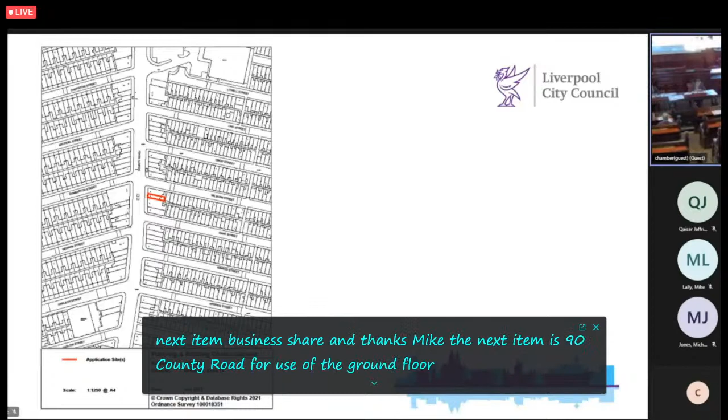Chair, yeah, thanks Mike. The next item is 90 County Road for use of the ground floor premises as a hot food takeaway. This was deferred at the last committee for further information. We do have the agent, Mike Carr, who's going to address the committee.

Mike, are you there? There we are. Would you like to address the committee, please? Hello, am I on? Okay, Mike, would you like to address the committee, please? Hello? Mike, are you able to hear us? No. Can you just confirm you can hear me, please? We can do, yes. Would you like to speak? We can hear you. I can't hear you very well. Can you just confirm that you can hear me, please?

Yeah, right, okay, thank you. As you'll be aware, this is the second occasion this application's been back to the committee. I think you're frozen. I think there's a delay on the line. Please continue.

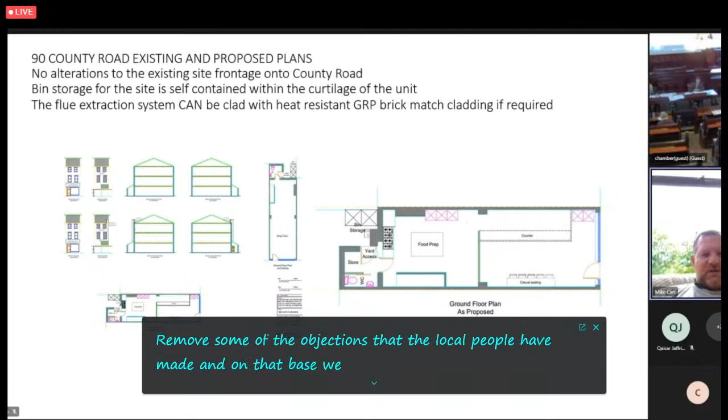Okay, thank you, Mike. Does the applicant wish to address the committee in any way? No. Okay, do members have any questions or comments to the agent? No, okay. Therefore, can I ask the team leader, John, to come in and summarise this application for us, please?

Thank you, Chair. So this is an application to use the ground floor of 90 County Road for the sale of hot takeaway food. The application was brought to you back in June of this year, and following an amendment by Councillor Prince, the matter was deferred in order to clarify a number of matters which are set out in paragraph 1.3 of the further report.

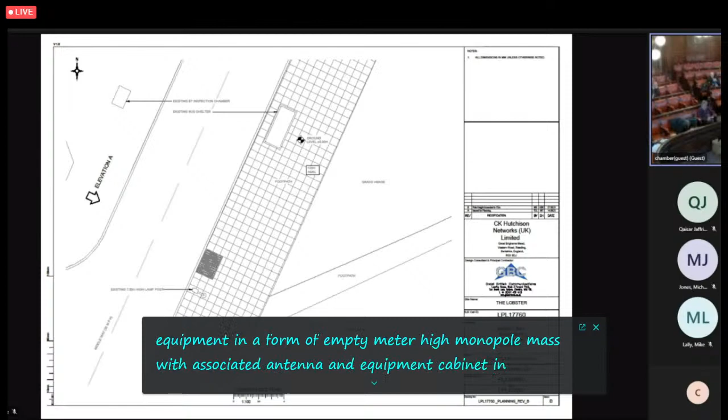We now come to the last item on the agenda, which is Middleway near Mossway, Liverpool 11, for the telemast. And there are no speakers for or against. Can I ask the team leader to come in and take us through this application, please? I can, Chair. I simply say that this is a familiar type of application to you. It is a proposal for telecommunications equipment in the form of a 15-metre high monopole mast with associated antenna and equipment cabinet in the location that's been described and set out on the plans. The conclusion of your officers is that this would not be harmful to visual amenity. Siting design is appropriate, and for those reasons, Chair, we are recommending approval.

Thanks, John. Are there any questions, comments from members? Councillor Prince: we've just, as you know, John, had one of these similar in our ward. I think the map on the last page is pretty hopeless. How far is it from any building? Are they shops? What are they next to it?

Chair, Councillor Prince, on the quality of the map, apologies for that. The site is adjacent to that, it's in the centre of the site where that arrow is, so it's adjacent to that open space. I'm not sure if we've got any photographs actually, Mike. Nothing, apologies.

Chair, can I attempt to be helpful here, as I used to represent that ward? The site is immediately adjacent to some open land, and the other side of the road is built upon, and it's fairly close to the crossroads, and I agree with Councillor Prince's comment that the map is useless. Thanks for that, Councillor Maloney. Councillor Beck: Councillor Maloney's already said exactly what I would, because I'm very familiar, obviously, living there. Okay, thanks for that. Are there any other comments?